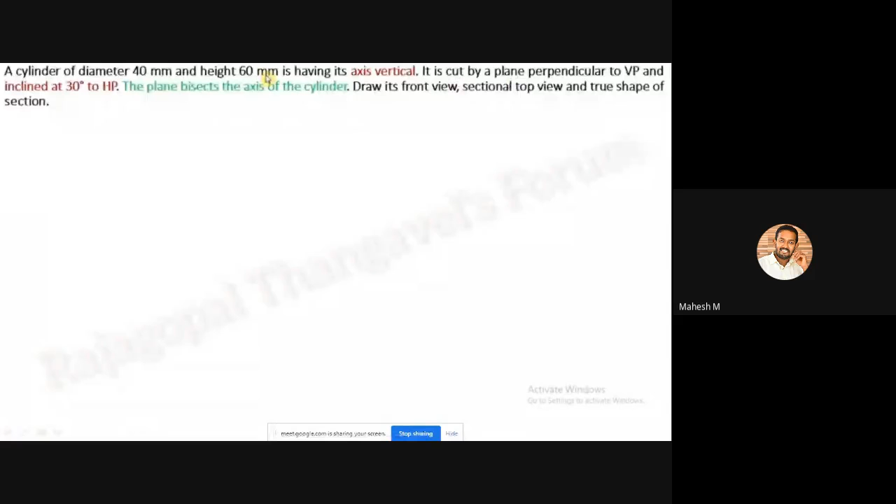So this cylinder is vertical towards the horizontal plane. That is the condition, and it is cut by a plane. There is no explicit word about section plane here, but you can understand that it is cut by a plane. What is meant by that? It is a section plane. It is cut by a plane perpendicular to VP and inclined at 30 degrees to HP.

So we'll be having the section plane in the front view, and you have to draw the sectional top view. That is our condition. If we are creating the section plane in the front view, then we'll be getting the sectional top view. If you are creating the section plane in the top view, then you have to create the sectional front view.

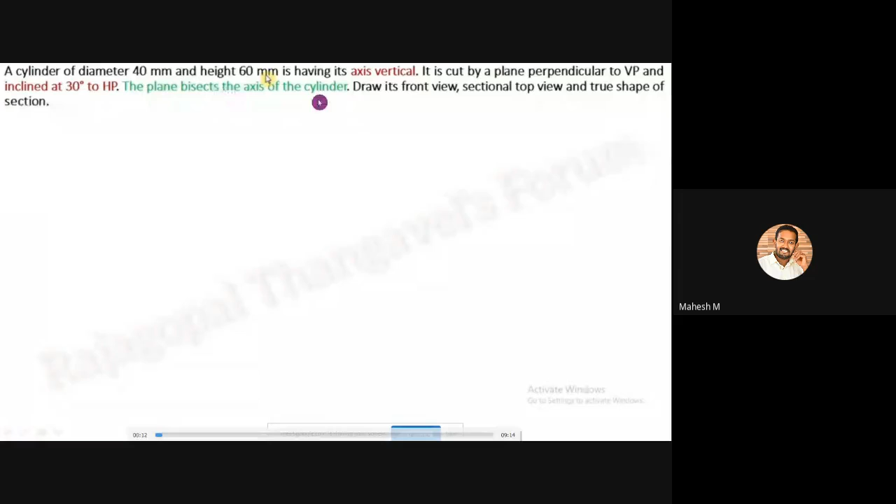So what is meant by this: the plane bisects the axis of the cylinder? What is the explanation of this? We have already discussed about bisecting of axis. So what is meant by that, bisect of axis?

What is the explanation of this particular highlighted word: the plane bisects the axis of the cylinder?

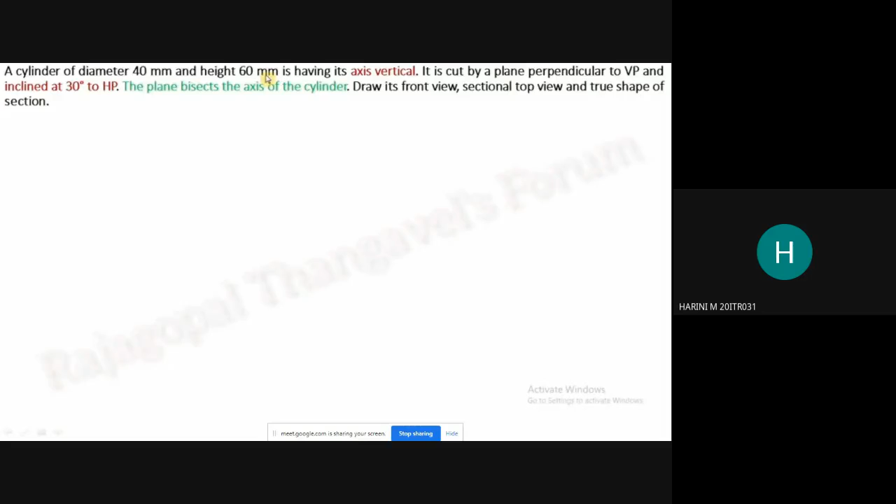You tell me, what is the explanation for this word: the plane bisects the axis of the cylinder?

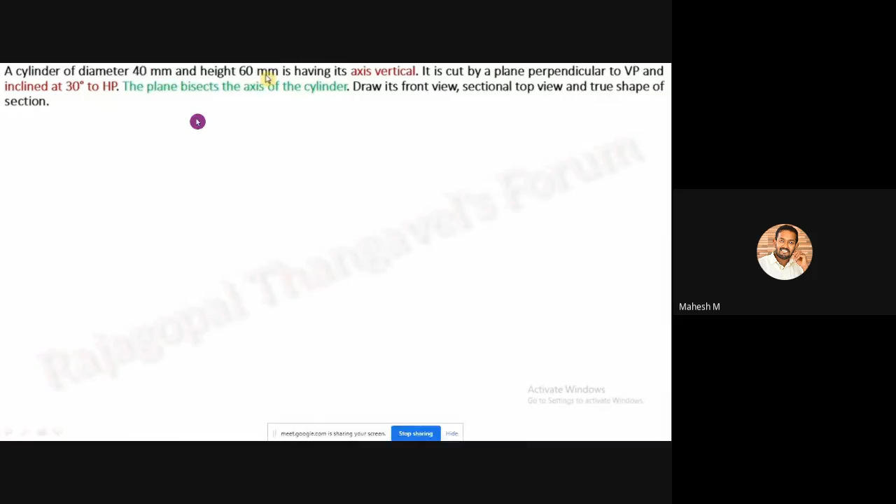Center, sir, center point. Okay, correct answer. That means it is the center point of the cylinder axis. Here the axis height is 60 mm, so you have to create a point exactly at the center, that is 30 mm from the base and 30 mm from the top. It should have equal distance from the base and equal distance from the top. So 30 mm is the right answer.

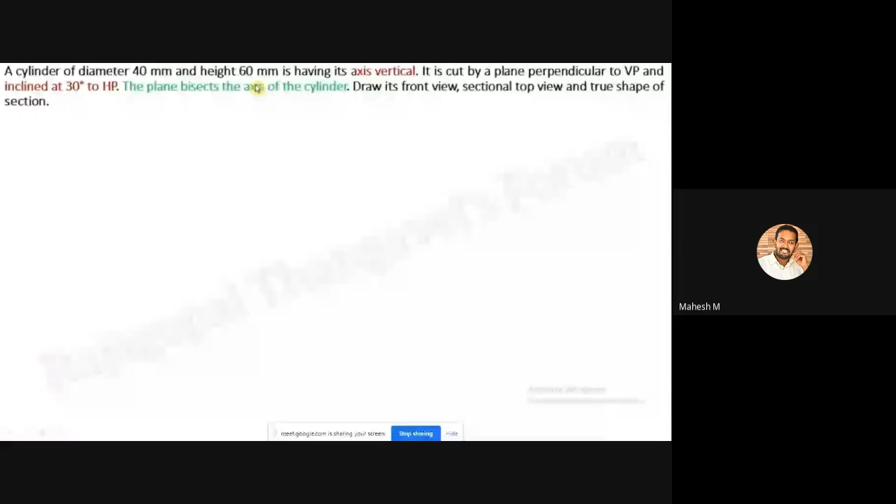So you have to pick a point exactly at the center of the cylinder. Then you can create a section plane with an angle of 30 degrees towards HP. So what is our objective? You have to draw the circle in the top view because the axis is vertical.

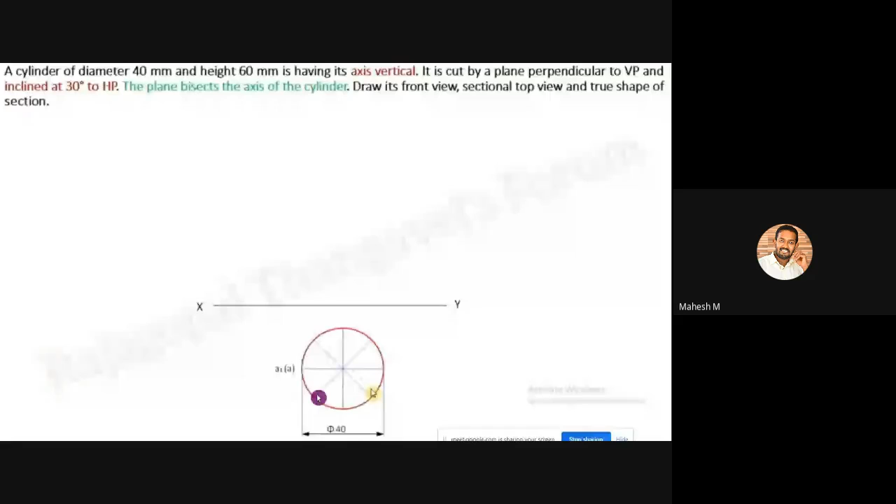You can create the horizontal line, then create a circle in the top view because the axis is vertical. The circle diameter is 40 mm, and you can divide the circle into 8 equal parts, naming each point with two notations because it is a cylinder, not a cone. If it is a cone, you create only one notation, but for a cylinder you create two notations. It's your own choice of notation.

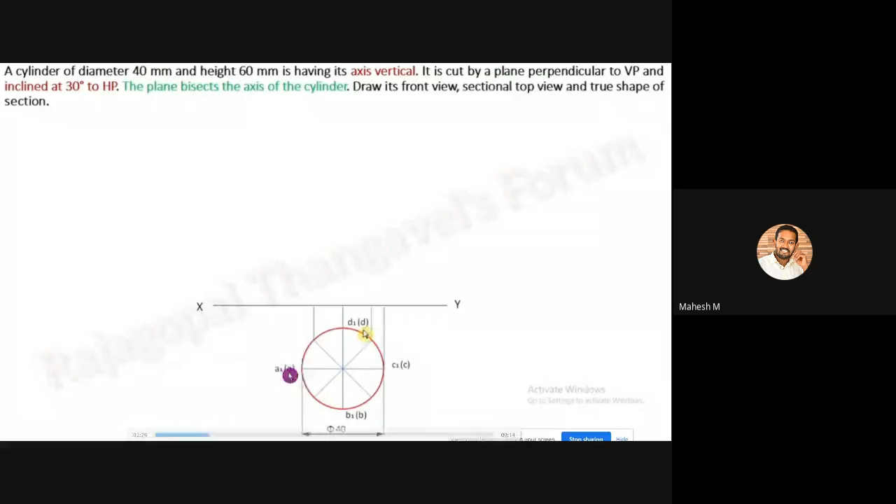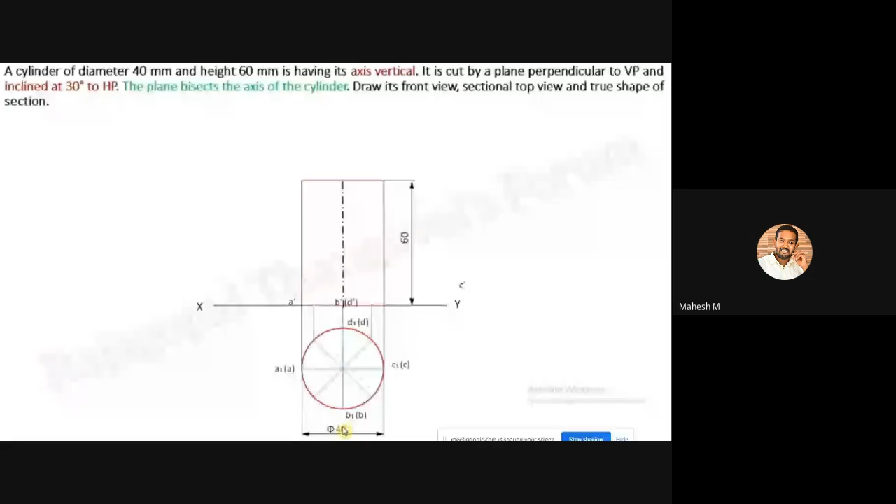Then you project all the points towards the front view. Then you create an axis. Since it is a cylinder, you have to create a rectangle in the front view, because if you look at a cylinder from the front view, it will look like a rectangle. You can create a rectangle, and the central divisions should be marked with a 2H pencil, so only the outer lines should be highlighted.

After doing this notation, you can start working on creating the section plane. For that, you have to pick a center point exactly at the center, because the condition is the plane bisecting the axis.

Okay, so the total height is 60 mm. So you can pick a point exactly at the center. Okay, so after doing this, you can create a section plane with an angle of 30 degree towards HP. So that means either you can create 30 degree from this direction, or else you can create 30 degree from this direction. It is your own choice.

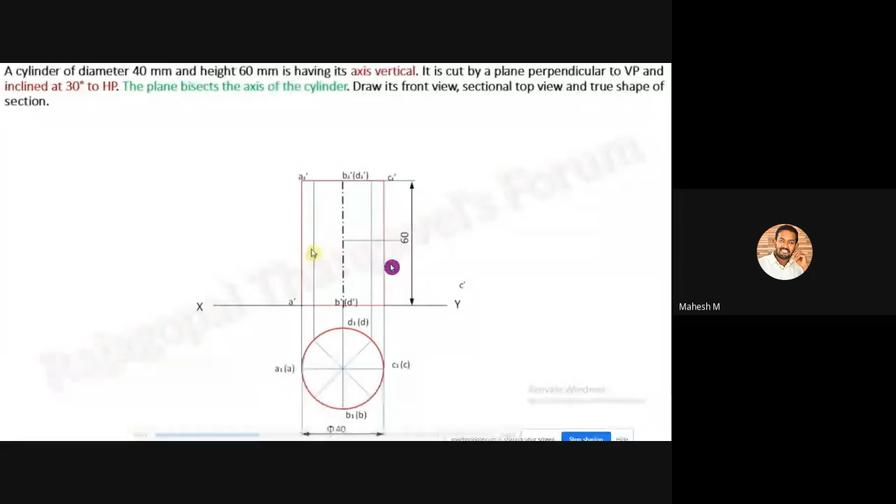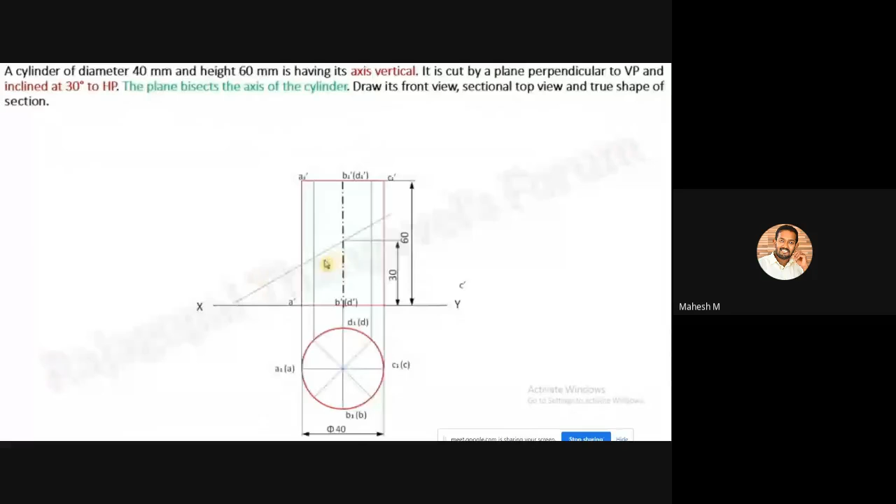So you can choose your own section plane position. Okay. So like this, we have created a section plane. Okay, so with an angle of 30 degree, it should touch the center of your axis. Okay, then you can highlight only this particular line.

Please remember one thing carefully. It is a section plane. So the condition of creating the section plane is that you have to highlight the extreme end.

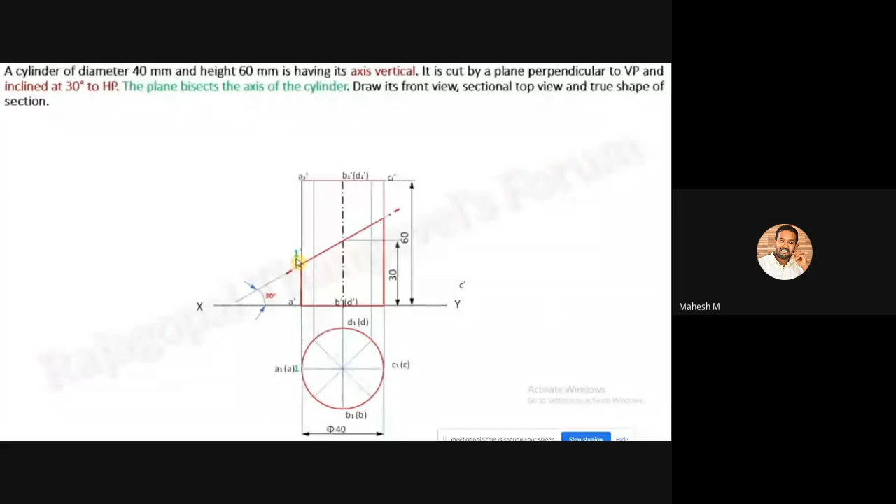Okay, so in this front view, we have totally removed the top surface. So the top surface has been totally removed. For example, if you are creating a line like this, that touches your top surface, you will be having one with section and one without section. But here, the total top surface has been removed. That means you can highlight all the circles with a hatching line.

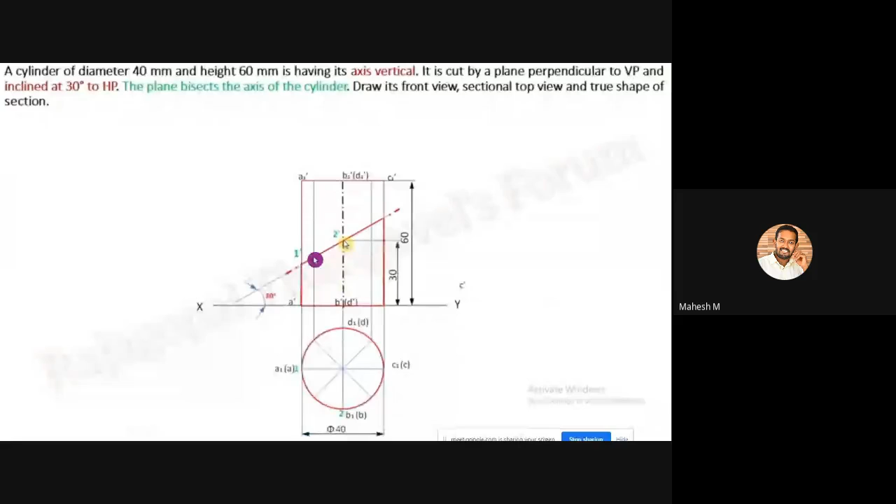Okay, and also you can mark the points. So this particular point can be marked as 1 dash, and this particular point can be marked 2 dash, and this one is 3 dash, and this one is 4 dash, and this one is 5 dash.

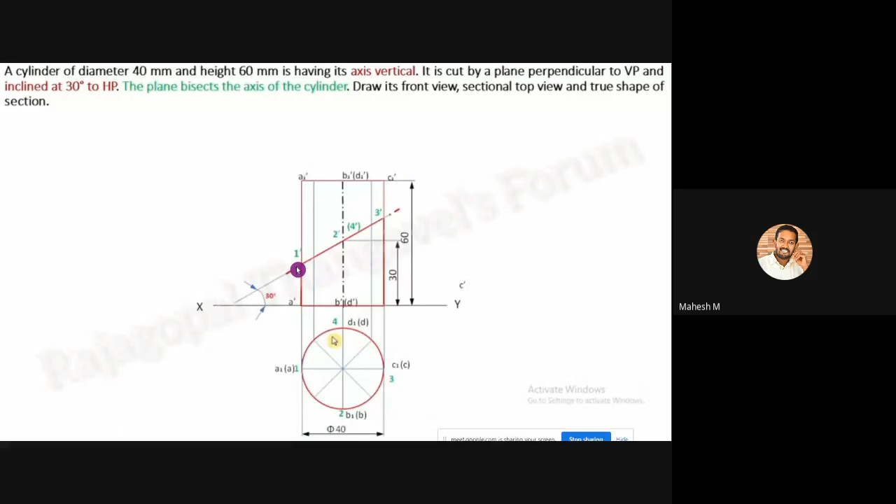Okay, so this one is 1, this one is 2, this one is 3, this one is 4, and this one is 5, 6, 7, 8. 6, 7, 8 is not visible from the front view, so you can mark 6, 7, 8 within bracket. So here in this video we have marked only 4 cutting points. That is why 1 dash, 2 dash, 4 dash and 3 dash are marked. If you are creating 8 points, then 6, 7, 8 is not visible. And also you can mark the hatching line on the entire circle because the total top surface has been removed.

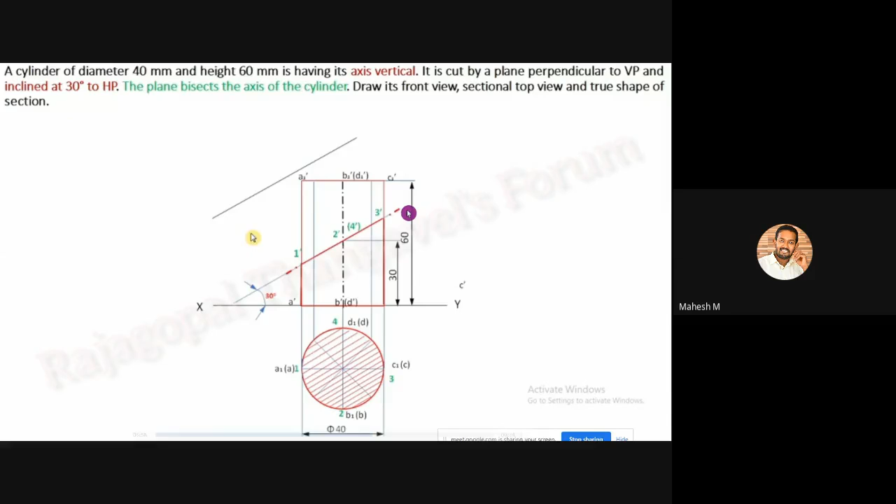So after doing this, you can create an imaginary reference line. Okay, so this reference line should be parallel to the cutting plane. So like this you can create an imaginary reference line with the name of x1 and y1. So after that you can project all the cutting points with a vertical line. So that means the line should have a 90-degree angle with the section line.

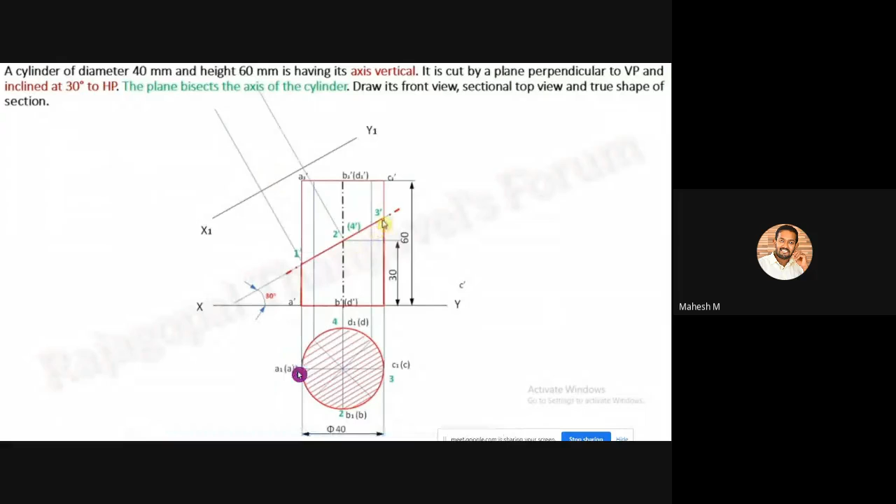So compared to this particular angle it should have a 90-degree. Okay, you can project all the points, then you can measure the distance between the reference line towards this particular point. So you can measure the distance between the horizontal line towards point number 1, and you can mark a point. Then you can measure the distance to point number 2, and you can mark the point.

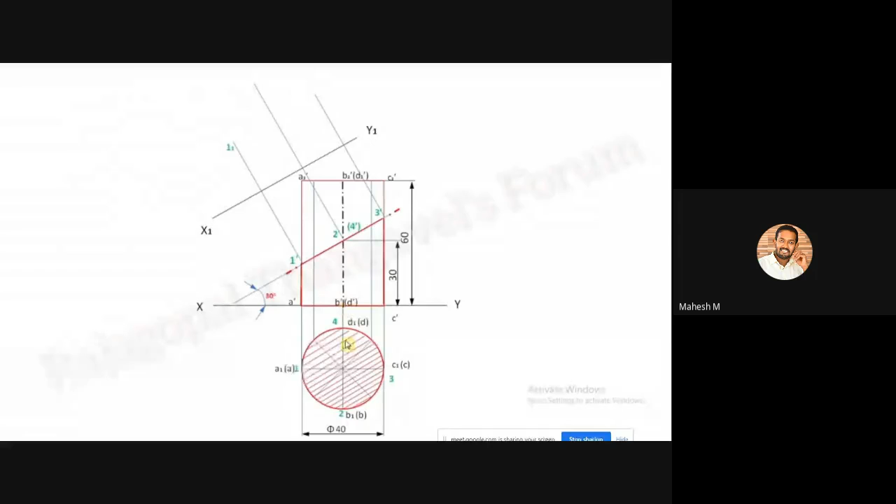Okay, so please mark all the 8 points. You can measure the appropriate vertical dimension, then you can mark all the vertical dimensions in this projection line. Then you can mark the notation as 1', 2', 3', 4', 5', 6', 7', 8'. So if you are connecting all the points, you will be getting an ellipse.

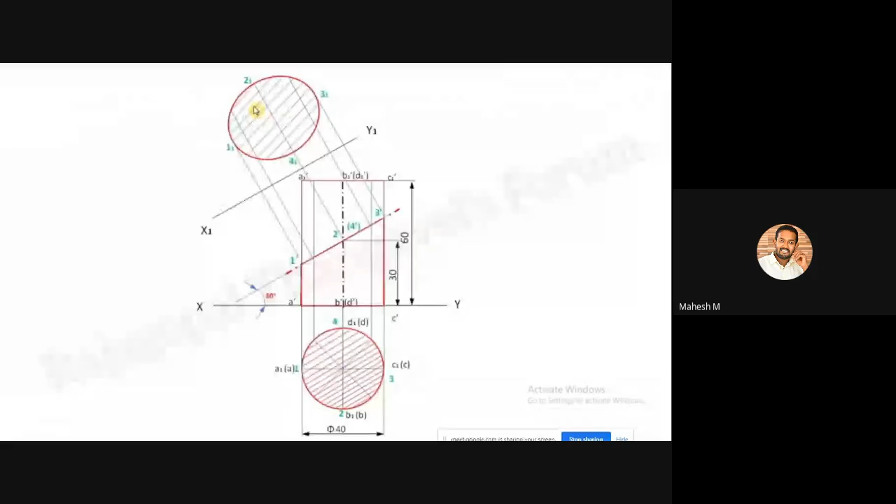Here the points are not marked with the notations. Only 4 points are marked, so you can connect all the 4 points. So you will be getting an ellipse. And also you have to create the hatching lines in the ellipse part. So this is our final true shape. The procedure is the same for all kinds of solids, but only the section plane concept is different.

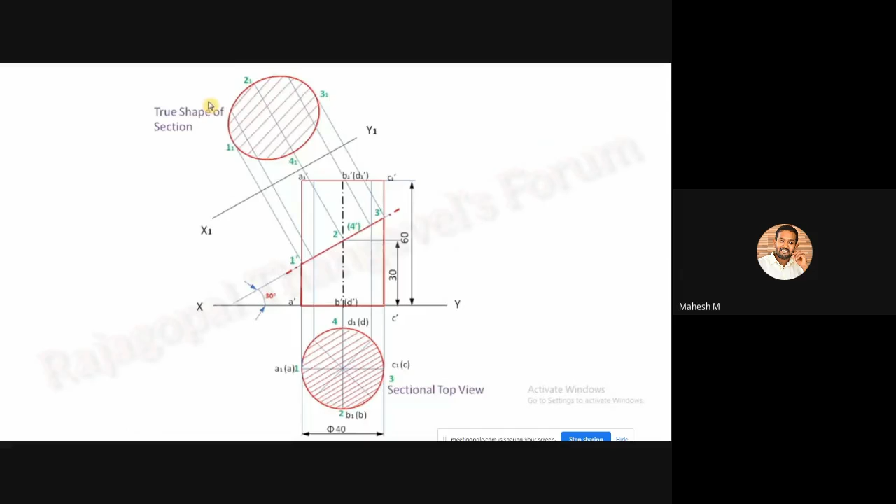Okay, so any doubts? Do you have any doubts in this cylinder? So you can draw this cylinder for today's class work, and I will show you one more video related with cone. We have already discussed a cone, so I will show you the video. Please look at this.

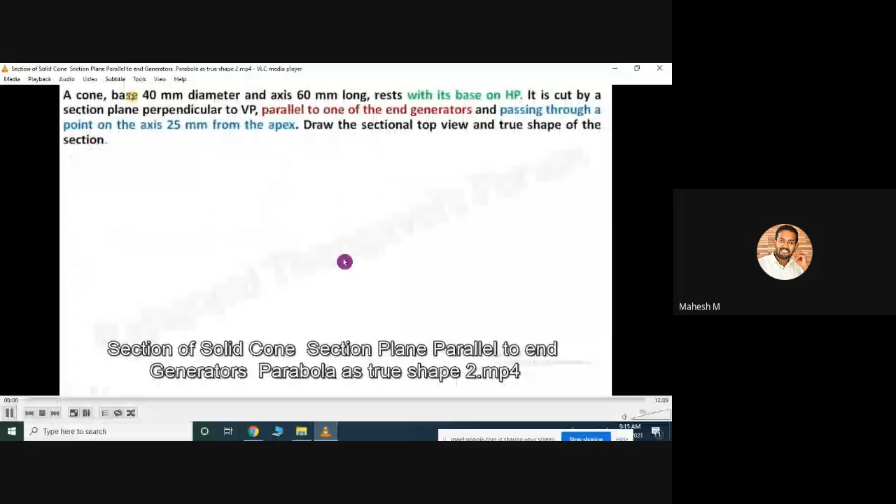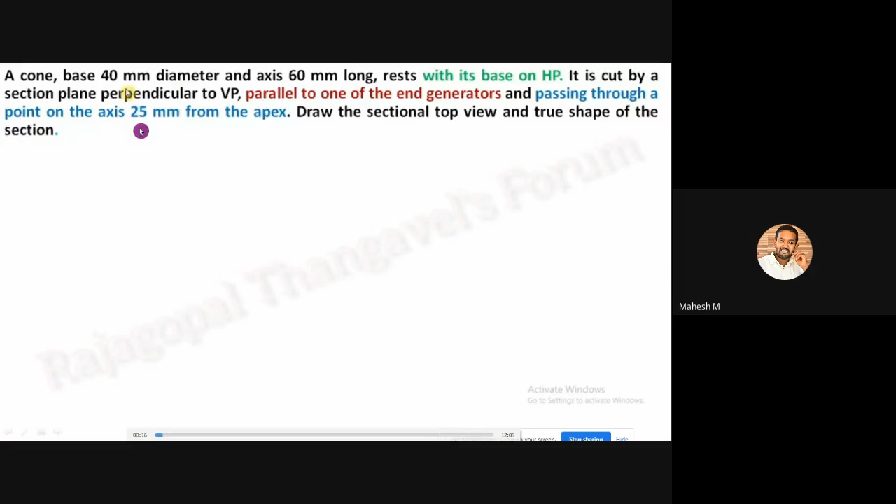A cone, base 40 mm diameter and axis 60 mm long, rests with its base on HP. It is cut by a section plane perpendicular to VP, parallel to one of the end generators, and passing through a point on the axis 25 mm from the apex. So I will show you the final diagram. This is our final diagram. We have already discussed this same diagram, but the condition was different. So what was the condition? The true shape will look like a parabola.

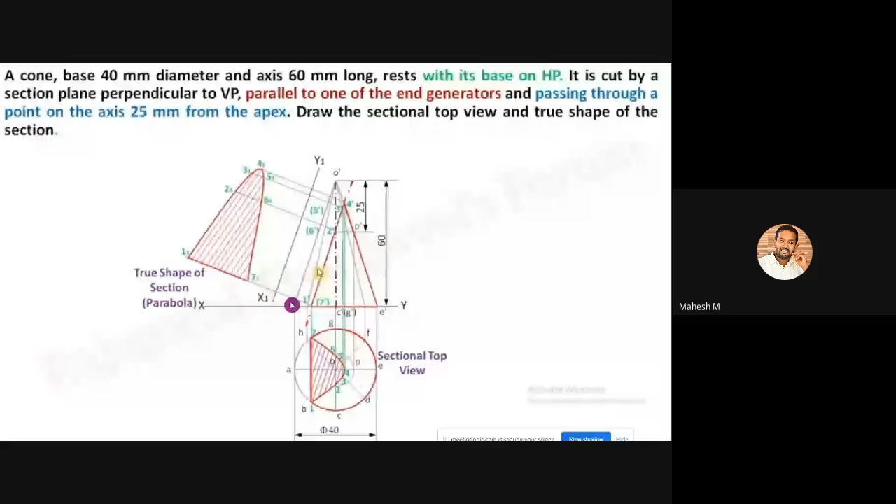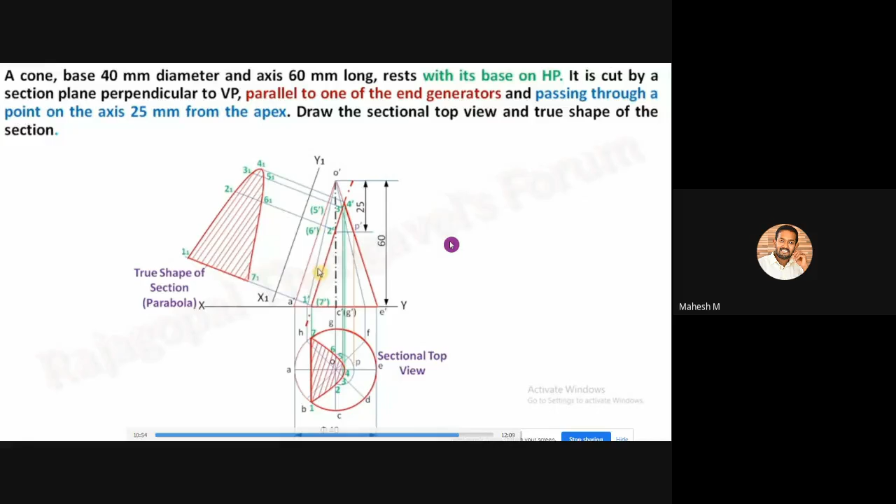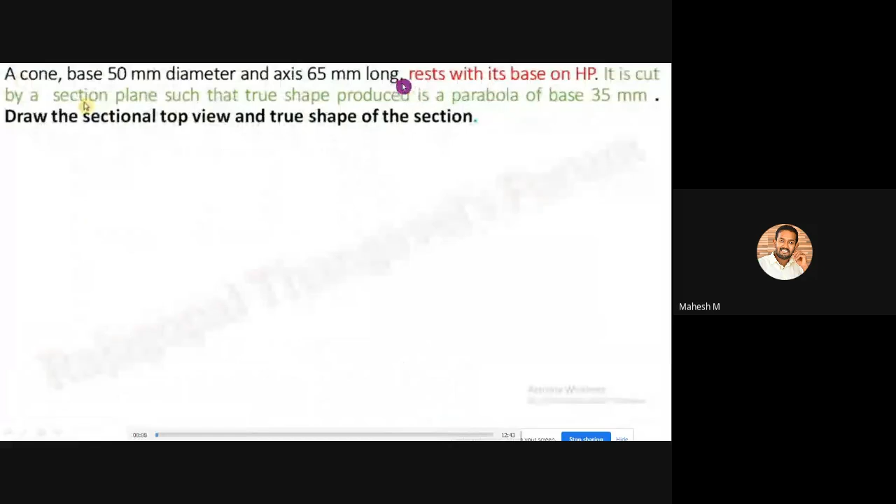If you are doing that, then you can project all the points towards the top view. You'll be getting a diagram like this, and you'll be getting a parabola like this. We have already discussed this in our previous class. This problem is equal to our previous problem: a cone, base 50 mm diameter and axis 65 mm long, rests with its base on HP. It is cut by a section plane such that the true shape produced is a parabola of base 35 mm.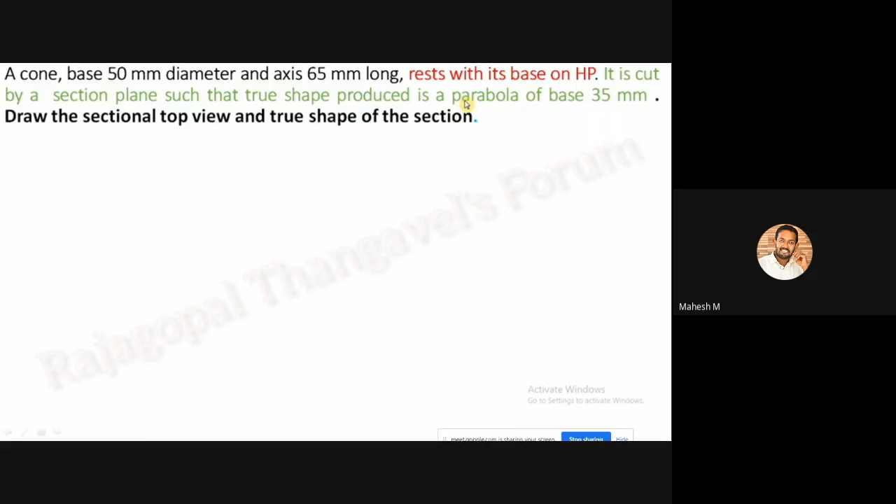The condition is different, but the final diagram is similar to this problem. So look at the final diagram. The final diagram is similar. Here also, this section plane is parallel to this generator, but this particular distance is not available. So for that, you will be having a parabola of base 35 mm.

So you'll be creating a base, that means a vertical line with a length of 35 mm, and the starting point and the ending point should touch this circle. After creating this, you'll be projecting this vertical line towards the base. Then you'll be creating the section plane parallel to the generator.

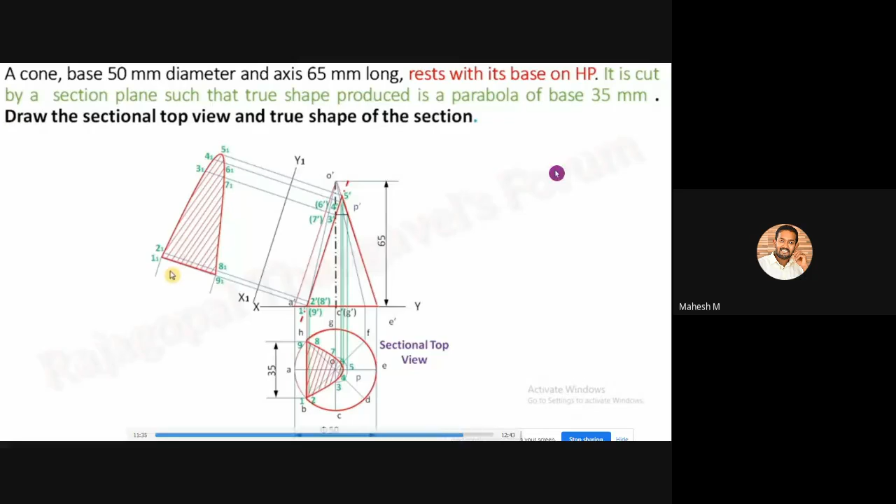Okay, so this is not needed as class work, because we have already done this class work. The cylinder only is class work number 1, and the next one is cube. We will discuss the cube. So what is meant by a cube?

So we can say a cone comes under pyramid. Similar to that, a cube comes under the prism category. For example, you can call it a square prism also. We can call a cube a square prism, because all the sides have equal distance. The cube has all sides at equal distance, so you'll have only one dimension for a cube.

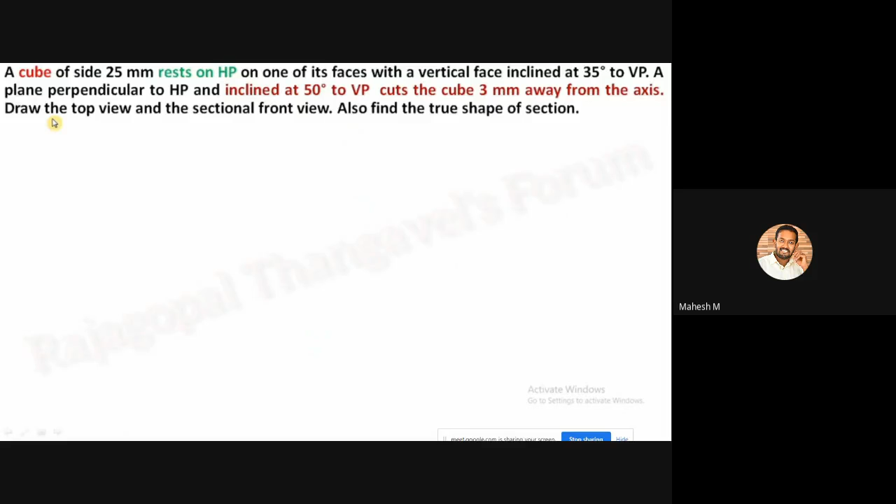A cube of side 25 mm. That means length, breadth, and height are equal to 25 mm. It rests on HP on one of its faces with a vertical face inclined at 35 degrees to VP. So what is the condition? You have to draw the square in the top view. That square should not be parallel to the reference line, nor perpendicular to the reference line. The condition is the square should be at 35 degrees to the reference line. So you have to create an inclined square.

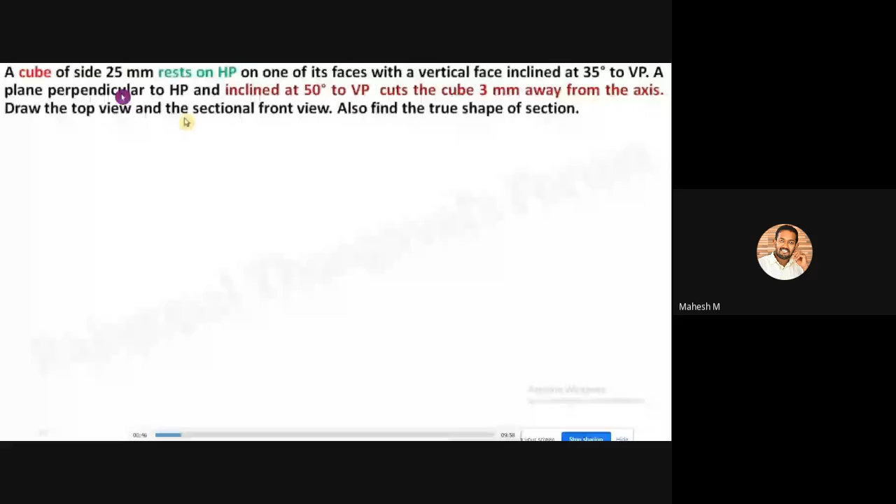After that you have the condition for the cutting plane. A plane perpendicular to HP and inclined at 50 degrees to VP cuts the cube 3 mm away from the axis. So 50 degrees to VP. Look at this: the cutting plane has an inclined angle of 50 degrees to VP.

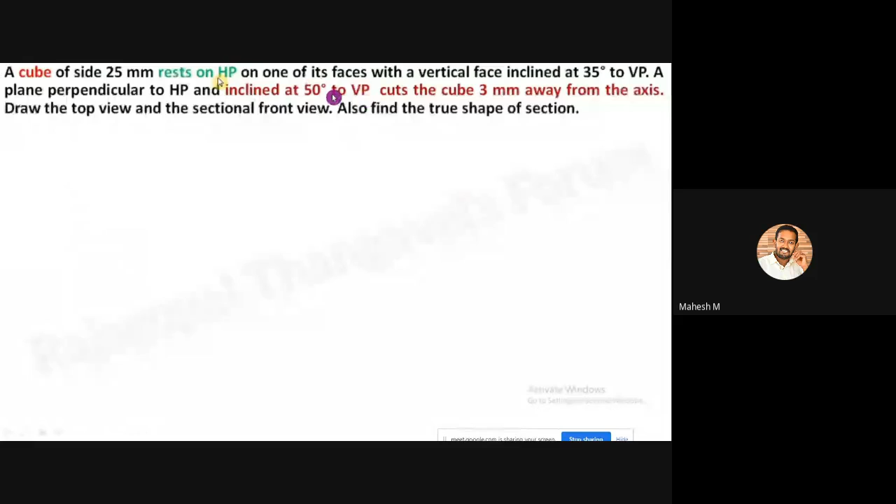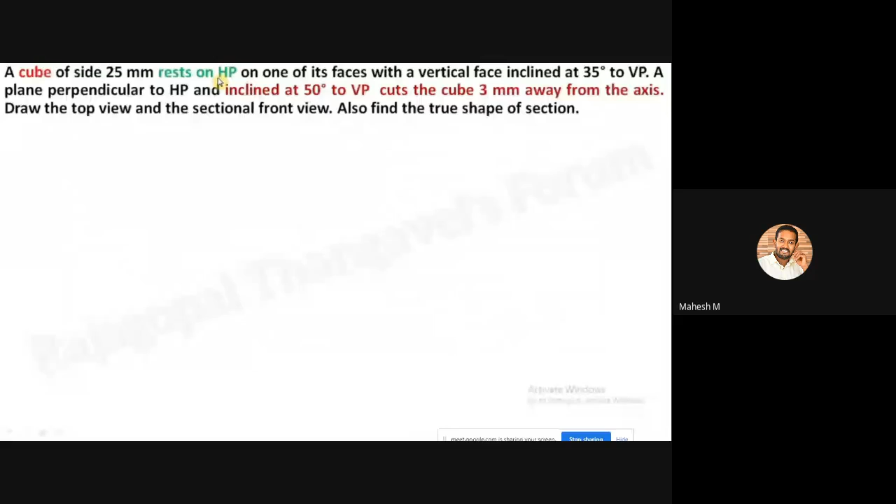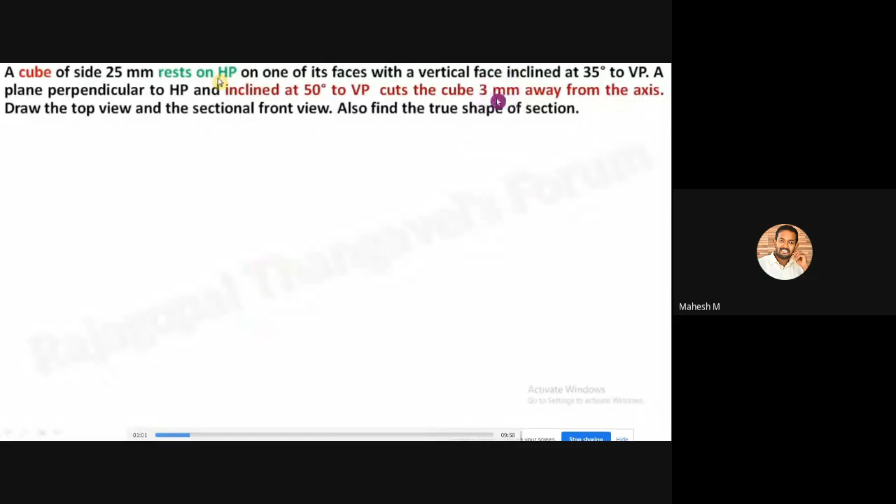50 degrees to VP. So if it is inclined to VP, you have to create the section plane in the top view. If it is HP, you have to create it in the front view. The condition is the same. The cutting plane should cut the cube 3 mm away from the axis. That means you have to create a circle with a radius of 3 mm. Then you can draw the top view and the sectional front view.

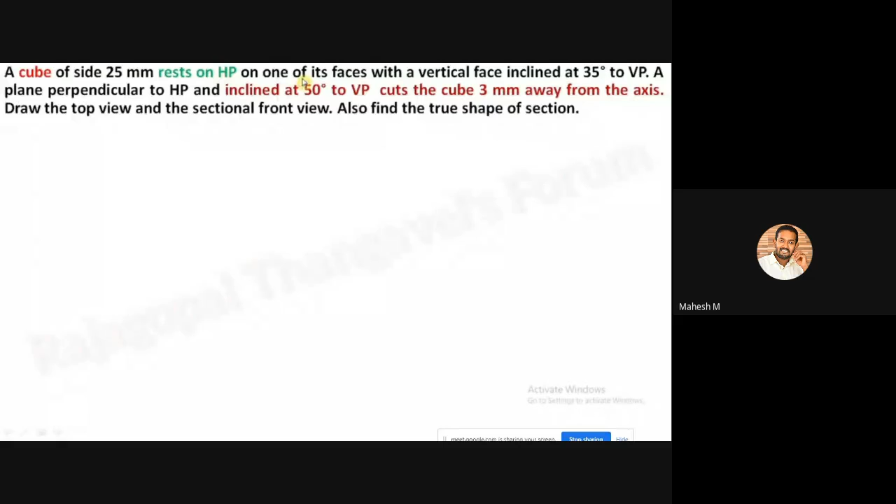So look at this. In this solid, you have a cutting plane in the top view. So you have to draw the sectional front view, and also the true shape of the section. Incorporating all the conditions, you have to draw the square in the top view with an angle of 35 degrees, a 35 degree inclination.

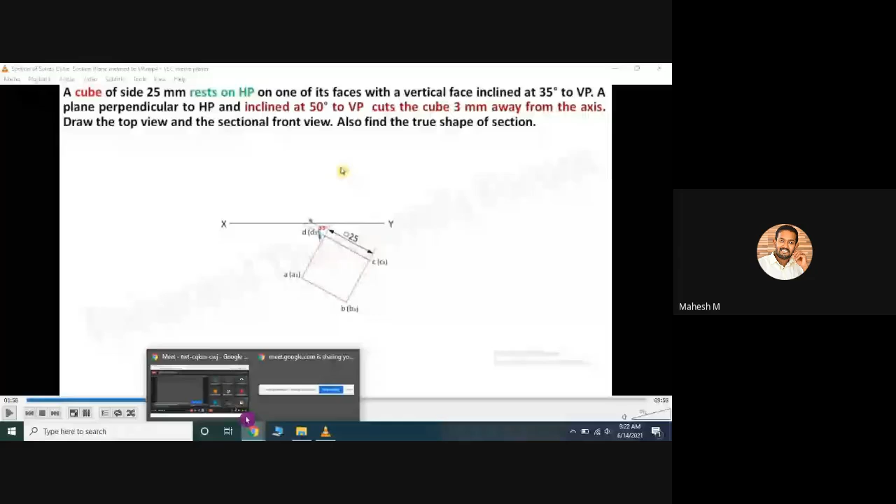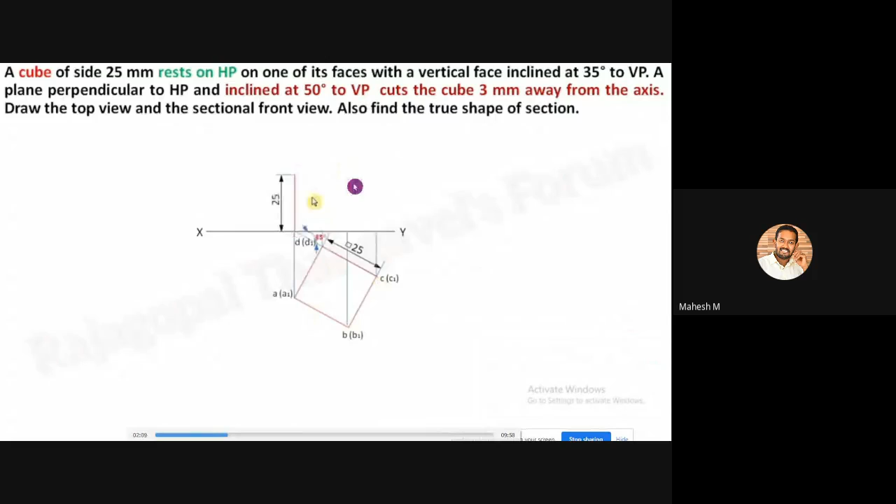Then you can project all the points towards the front view. In the front view, you have to draw a rectangle because it is an inclined top view, so it will look like a rectangle. This corner is visible, so you can mark a dark line; this corner is visible, so mark a dark line; this corner is also visible, mark a dark line. But this corner is not visible, so you can mark a dotted line for this corner.

Then please mark the center point for this cube. The center point will be here, at the center. The condition is that the section plane should be 3 mm away from the axis, so you can mark a circle with a radius of 3 mm. The center point is the axis point for this cube. The center point can be marked with two lines.

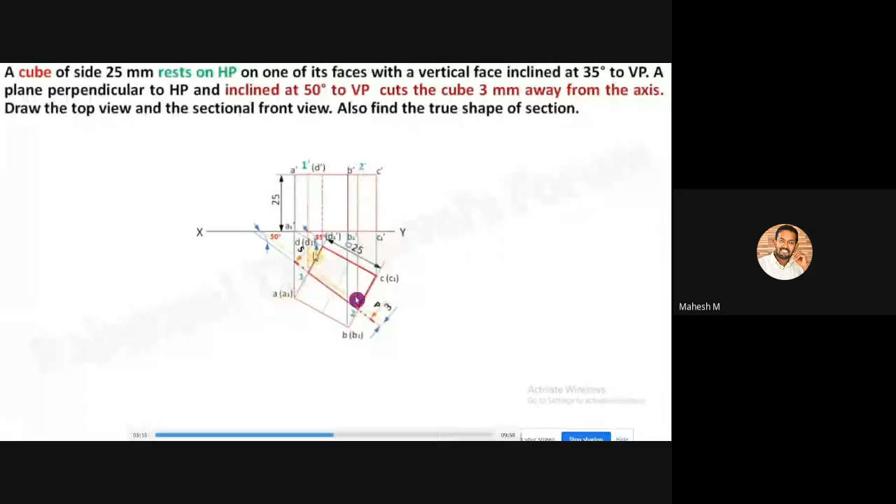So you can create a hatching line in between point number 1 and point number 2. Okay, and this particular corner is not removed. So you have to create a dotted line for this.

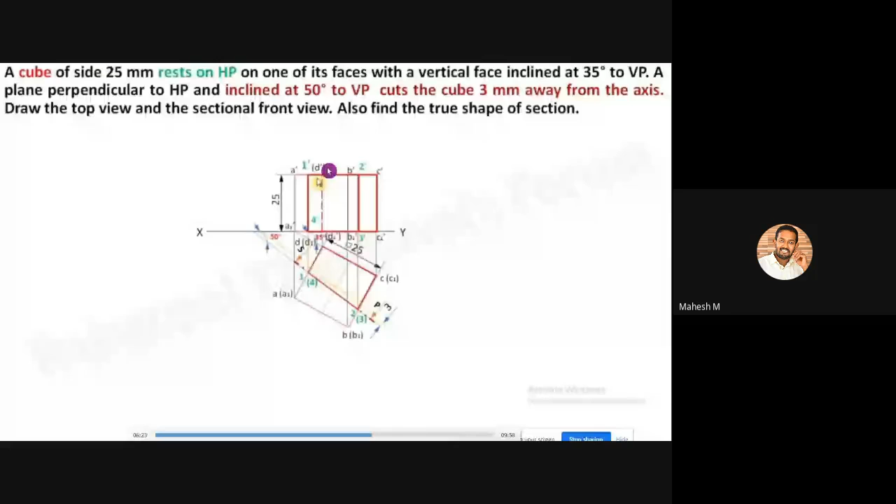So you can highlight this rectangle, and also this particular portion is also visible. Okay, so you can highlight this one too. So after doing that, you can create the section line in between this 1 2 3 4 rectangle. The dotted line, it is not necessary, but in some textbooks you can see the dotted line also, but the condition is you don't have to show the dotted line in between the hatching lines. Okay, so like this.

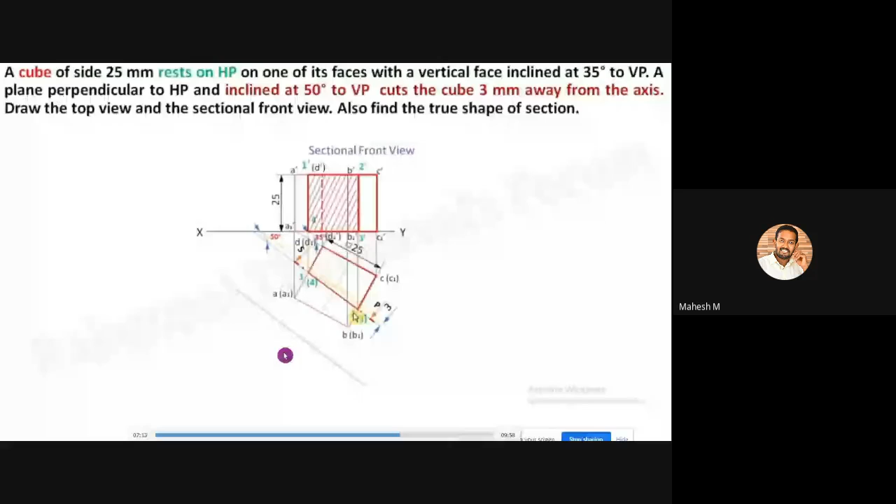So after creating this hatching line, then you can start working on creating the true shape. Before that you have to create the imaginary reference line that should be parallel to the section line. Then you can project all the cutting points towards the reference line with an angle of 90 degrees. Okay, so you are having 4 cutting points, right?

So 3 and 4 is on the reference line, so you can mark this point as 4, and you can mark 1 dash with a distance of 4 dash to 1 dash. So you can mark the distance. Okay, similar to that you can mark this point as 3. Then you can mark 2 with this vertical distance. So with this vertical distance you can mark the point 2. So you can join all these 4 points.

After creating this, you can mark all the 4 points with a dark line. Then you can highlight with a hatching line. Okay, so this is the true shape of this diagram. Is it clear? Any doubts? Do you have any doubts?

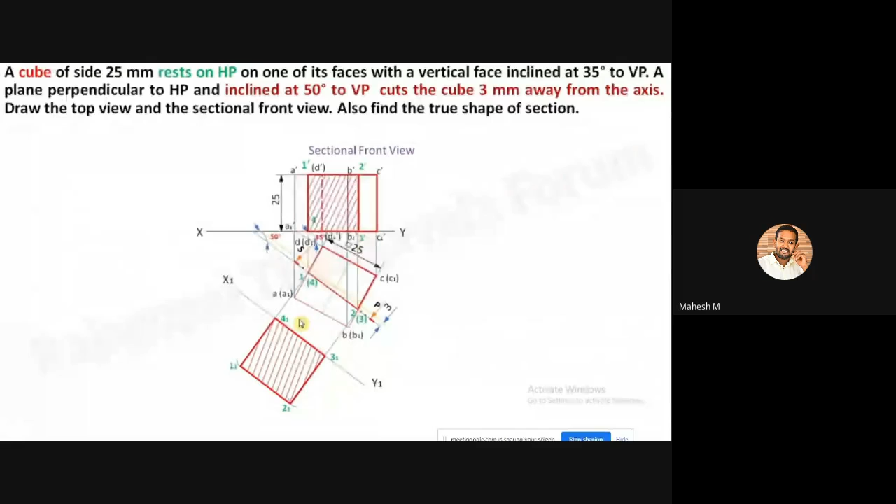Okay, now the last diagram, I have 15 more minutes. I will show you the last diagram. So far we have discussed cylinder and cube. So 2 problems. Cone draw பண்ண வேண்டாம் because cone நம்ம already discuss பண்ணிட்டோம். So next one is a square prism. Square prism will also look like a cube, but only the height will have a different dimension. That is the condition.

So a square prism, side of base 40 mm and axis 60 mm long, rests with its base on HP. So since the base is on HP, you have to draw the top view with the square. But you have to look whether the square is a parallel square or else it is having inclination. One of its rectangular faces is inclined at 30 degrees to VP. So then you have to create a square with an angle of 30 degrees, similar to our previous problem. So cube எப்படி பார்த்தோமோ அதே மாதிரி you have to draw the square with an inclination of 30 degrees.

Then look at the condition for the section plane. A section plane perpendicular to HP and inclined at 60 degrees to VP. So it is having an inclination of 60 degrees towards VP. Okay.

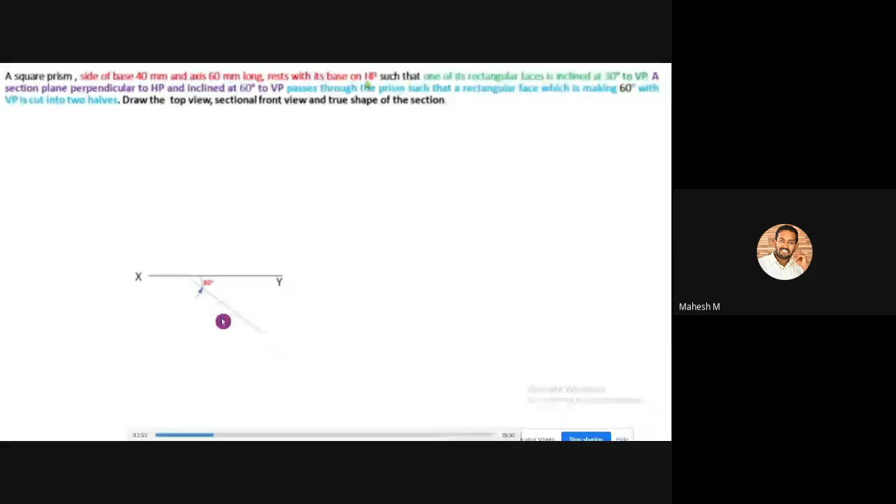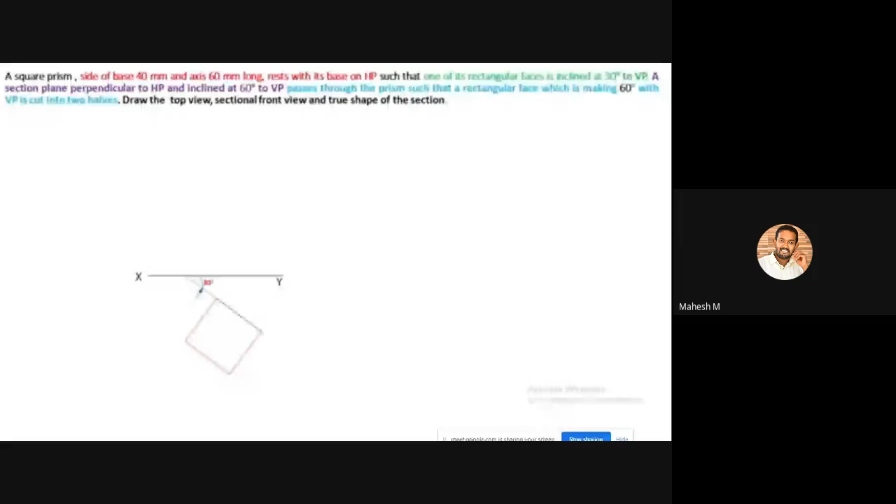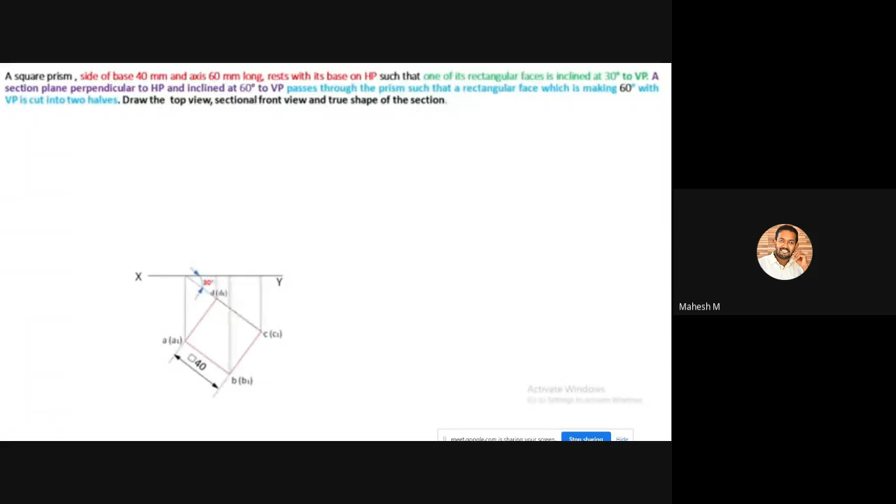Okay. So I will tell you how to draw this section plane condition. So initially you can create a 30 degree inclined line. Then you can mark the square. And you can project the square towards front view. Before that, mark the notations. Since it is a prism, you have to mark two notations for each and every corner. So you can mark A of A1 or else A of 1 or B of 2. Similar to that, you can mark the necessary notation. Then you can project each of these four corners towards front view.

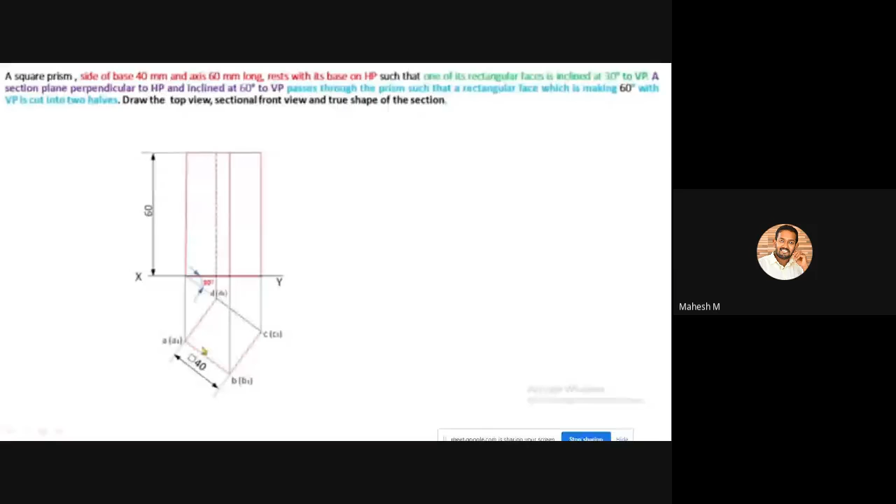Here the height is 60 mm because it is a square prism, so you'll be having a different height. The difference between cube and square prism is that you'll be having a different height in square prism and the same height in the cube. Okay, so after doing that, what is our condition? You have to draw the section plane. The section plane should have an inclination of 60 degree towards VP and also pass through the prism such that the rectangular face which is making 60 degree with VP is cut into two halves.

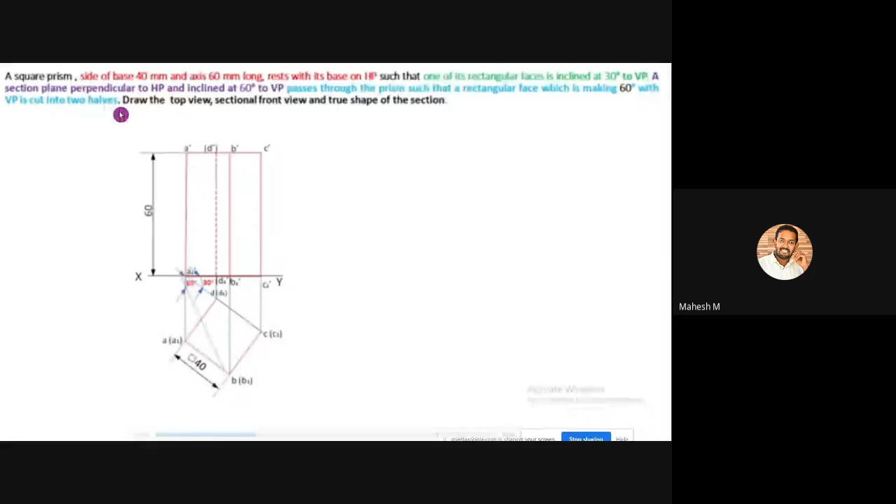So we have already created this rectangle with an angle of 30 degree, but any one rectangular face will have a 60 degree with VP.

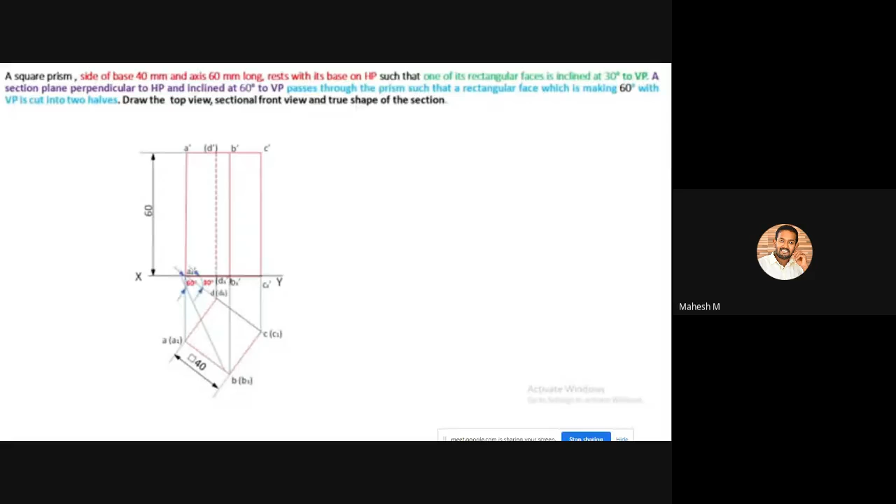So that is the basic condition for a square. If we are creating 30 degree for any one face, the remaining two faces will have a 60 degree angle. So what do we do? It passes through the prism such that the rectangular face which is making 60 degree with VP is cut into two halves. So that particular face should be cut into two halves. Here you are not given a distance for the cutting plane. Instead, you have to cut the surface that is having 60 degree with VP into two halves.

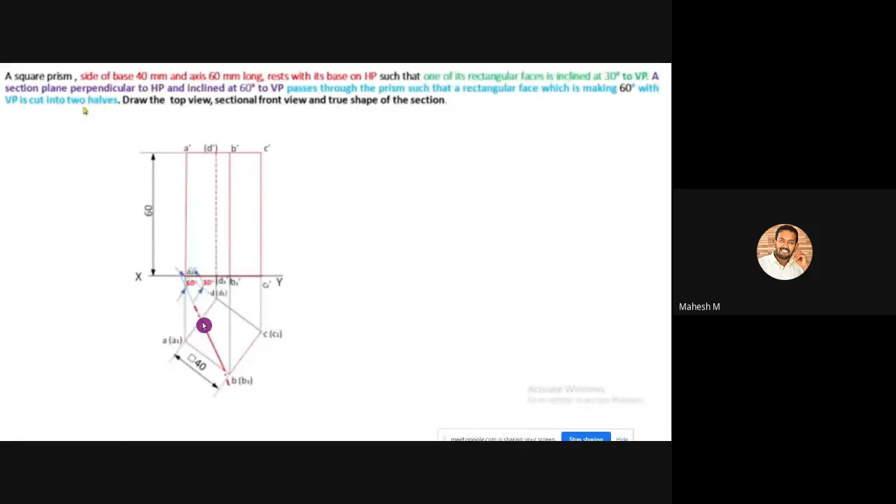So you have to cut this surface into two halves. That means the section plane should pass through the center point of this particular face. And also, the section plane should have a 60 degree inclination with the VP. So you can mark the center point of this face. This line has a 40 mm distance, so you can mark a distance of 20 mm.

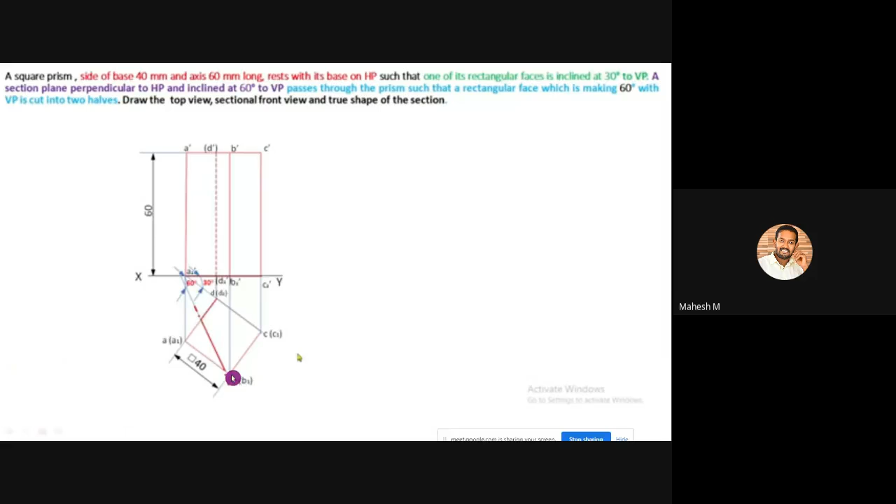Then you can create a 60 degree inclined line because the section plane has a 60 degree inclination. That 60 degree inclined line should pass through the center point of this face, or else you can choose this face also. It is your own choice. So you can create a dark line on the surface, then you can highlight all the remaining surfaces. Only the smaller portion has been removed.

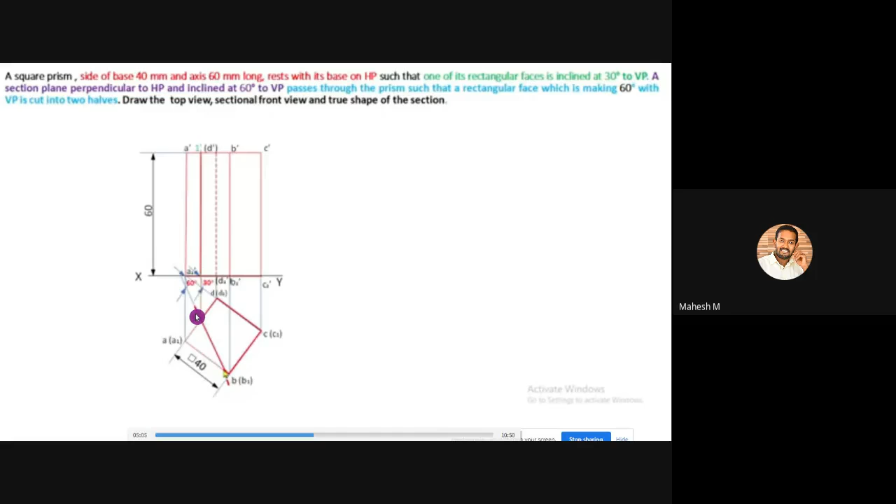Similar to our previous problem, you can project this point and these cutting points towards front view. This particular corner is not removed, so you can highlight this corner also. It will look like a vertical line in the front view. So here you are having four cutting points: this one is 1, this one is 2, this one is 3 and this one is 4. So you can project these points towards front view, similar to our previous problem.

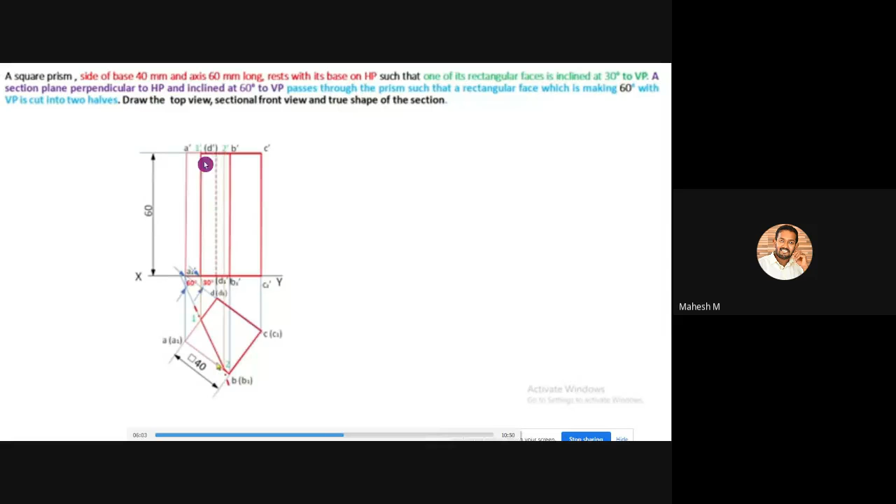So you have to create the section line in between 1, 2, 3, 4. This one is 1, this one is 2, this one is 3, and this one is 4. So you can create the section line in between this 1, 2, 3, 4 rectangle. This portion has been removed, so you don't have to highlight this particular portion.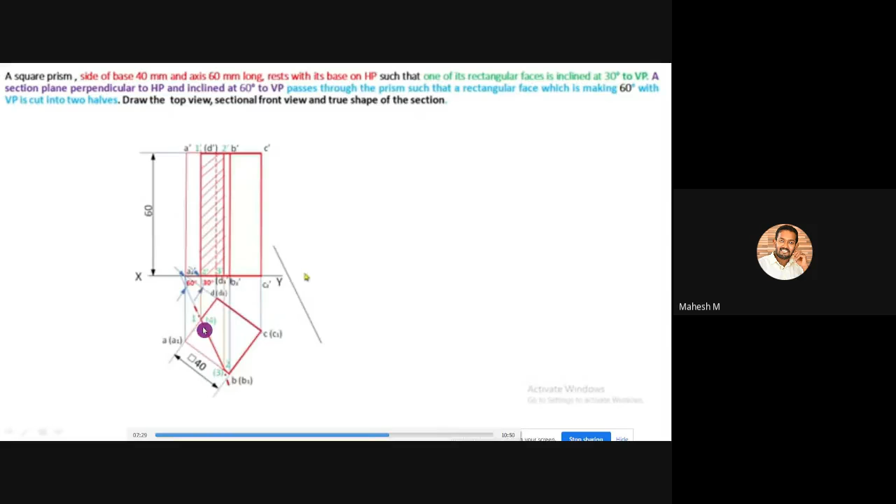Okay, so you can highlight that. Then after that, you can start working on true shape. For the true shape, before that, you have to create the imaginary reference line.

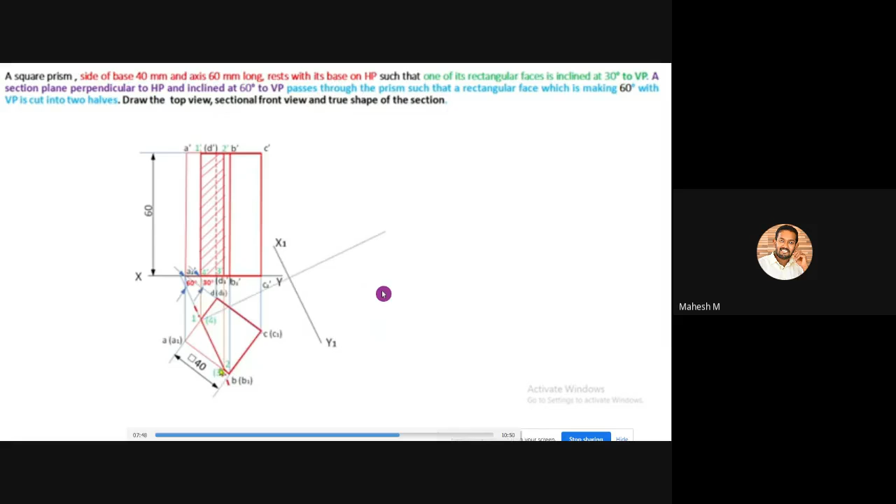Either you can create the imaginary reference line in front of this top view, or back side of this top view, in the particular area. Or you can create it here also. So you can project these points towards the imaginary reference line with an angle of 90 degrees.

Then you can mark all the points with this distance. So 3 and 4 is on the reference line. This point is 3 and this point is 4. But point number 1 and 2 is far away from the reference line.

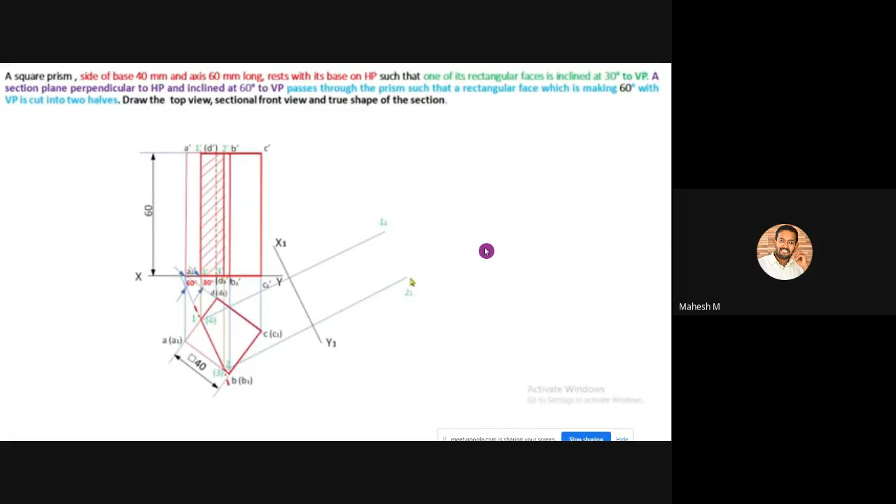So what is the distance? That is 60 mm. So you can mark the distance and create a cutting point with the name of 1 1 and with the name of 2 1 at here. Okay, so now you got all the cutting points 1 1, 2 1, 3 1 and 4 1. You can join all the points, then you can create the hatching line.

Okay, so square prism and cube is similar, but the only difference is the height has a different dimension for square prism. The problem we are going to draw is similar to the previous problem we saw. But the cutting condition is different and the height value is different.

Okay, so any doubts?